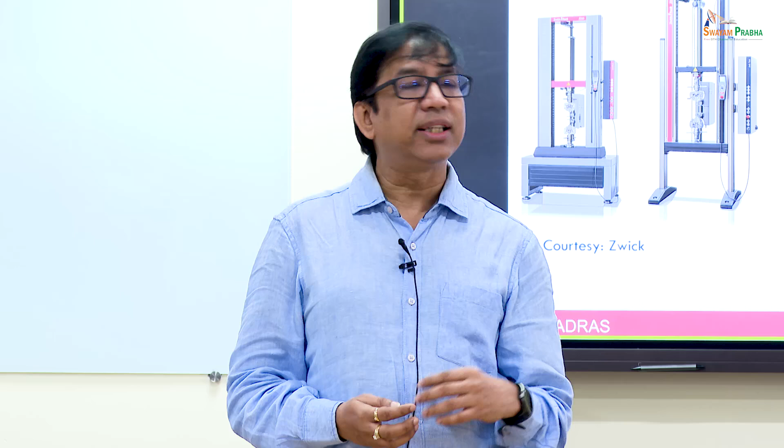Although you have come here and registered for additive manufacturing, and I would like you to know more about additive manufacturing, I think areas such as this are very attractive, but we also have to live in reality and see whether a certain technique, however novel it could be, would be industrially viable, whether we can really take it to applications. Therefore, I will take just 1 hour talking about mechanical properties of these materials.

So when you talk of mechanical properties of materials, obviously we need to know and understand how we do this testing. Testing techniques cannot change. Whether your manufacturing techniques can change, but testing techniques cannot change. Maybe it can get modified depending on the size of the samples, but the testing techniques cannot change.

Whatever mechanical testing techniques I talk about today is something you may already be aware of. But I still feel it's important to emphasize, because many times what we think we know, it's important to know much better so that we understand how to use these techniques for the kind of material systems we are working on, and for the techniques we have used. So the disclaimer is: you may have known this, but nevertheless it's important to quickly review it. If you have any questions, please feel free to stop me.

Why are we interested in this? We are interested because new manufacturing techniques enable us to look at applications. As engineers, we always look at applications. One of the prominent applications we are currently looking at is the use of these advanced ceramic materials for various applications - automotive, aerospace, semiconductor. These are three very vital applications where we generally look at using ceramic components.

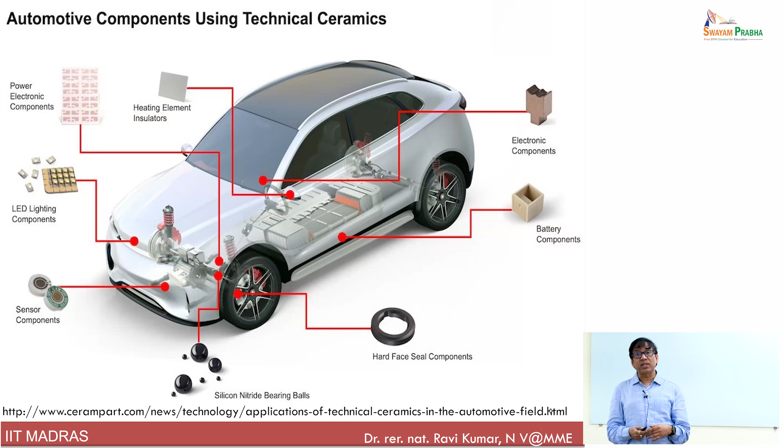One of the major manufacturers, I'm sure you would have heard, Tesla, is one of the major companies which uses technical ceramics extensively, as opposed to other companies like Ford.

Just to tell you a few more applications - ceramic coolers. How many of you are aware of it? I don't know. Ceramic coolers are very relevant in modern applications because they can be electrically insulating but have very high thermal conductivity. Of course, choice of the right metal becomes very important. So ceramic coolers and ceramic heat sinks for electric mobility is a modern choice.

I will show you another example where such ceramic heat sinks are manufactured, and which is not only used for automotive applications but also in electronics. Wherever you think we can replace metallic materials, which obviously has high thermal conductivity, we are looking at long-term stability and very harsh applications, while giving more or less the same results as a metallic material with high thermal conductivity would have given. So ceramic coolers and structured ceramic coolers are a reality as of today.

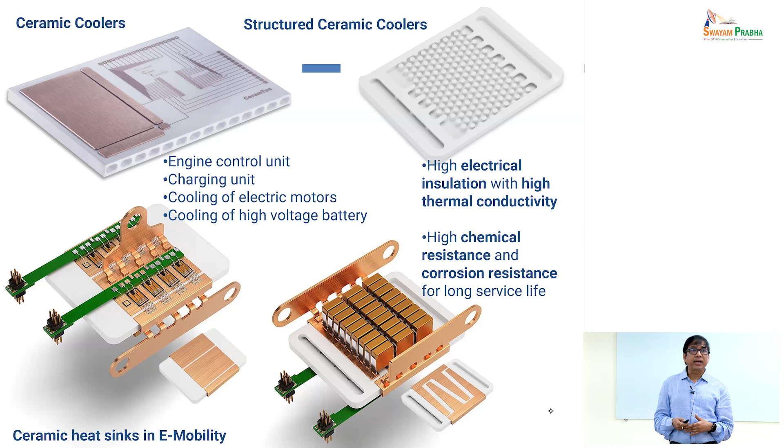If you look at this application, this is a ceramic heat sink - a very nice application, I really like this one. I show this many times because we have all seen heat sinks made of copper based materials, but I don't know how many of you have seen alumina and aluminum nitride based heat sinks like this, with printed electronics even over that. This is a very nice application because you are completely replacing it with a ceramic that has reasonably high thermal conductivity. For instance, aluminum nitride has a reasonably high thermal conductivity and can be a very good competitor to copper.

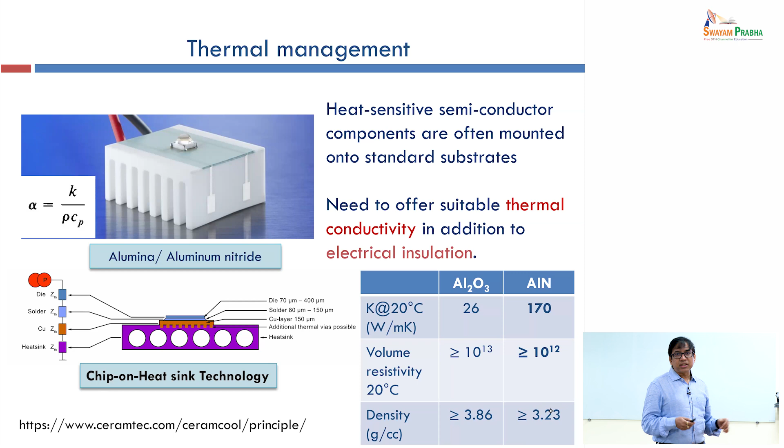But if you look at the geometry, to design a heat sink you require a very high surface area because you need to dissipate heat - that's the engineering part of it. And the material part is it has to have very high thermal conductivity. Now, having a high thermal conductivity, you can always talk to a very good ceramic scientist and he can tell you. But to make a ceramic heat sink like this with very high surface area becomes a challenge. That is where I feel a route such as additive manufacturing could be very much helpful, because manufacturing such ceramic heat sinks via other conventional methods and machining can be a problem. I think this is where additive manufacturing can be a very useful technique.

Another example I have started to use in recent times because I was very much impressed. Most of you aware of bearings might have seen bearings with steel balls or steel rollers. When I first came across this a couple of years back - that these steel rollers and steel balls are completely replaced with ceramic balls and ceramic rollers in bearings - I was very mesmerized, very impressed with the manufacturing of such silicon nitride balls and silicon nitride rollers in bearings. I continuously bothered somebody in Europe to send this to me, and finally he sent it to me, and I just wanted to show this to you. Don't drop it - if you drop it, I'll keep you here for a PhD.

So this is a silicon nitride ball manufactured by one of the European companies, primarily meant for use in bearings, replacing completely steel balls. Because if you look at steel, the density of steel versus the density of silicon nitride - silicon nitride density is around 3 gram per cc, and steel has a density at least more than 2 times that of silicon nitride. So we are already looking at use of such ceramics in load bearing applications - it's a load bearing application. So now you can see, can we manufacture such components using additive manufacturing - that is a challenge.

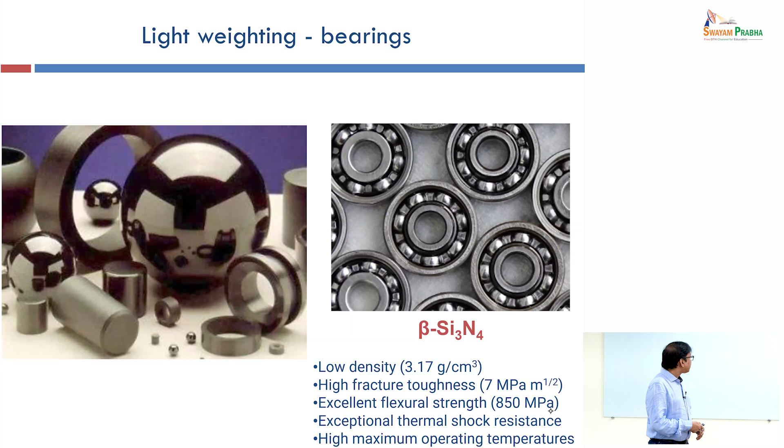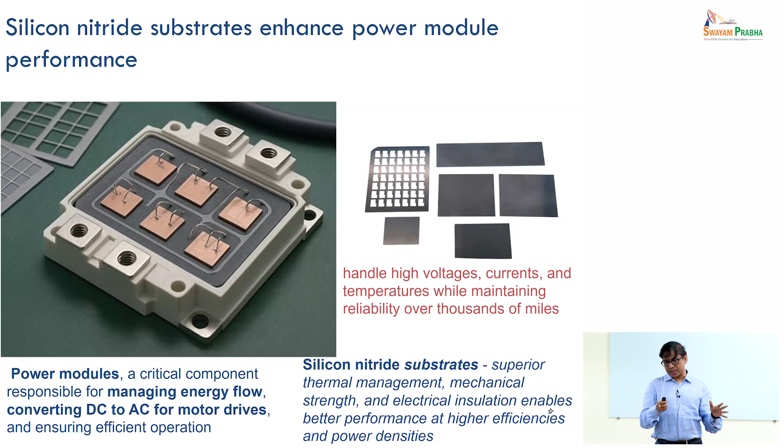Nevertheless, you should know that such applications are possible and very much relevant in modern times. This is again a silicon nitride substrate. I was very happy to see this because now silicon nitride substrates are used as power modules for electric vehicles, and people would like to manufacture them with almost no defects. This manufacturability may not be so complicated and may not require additive manufacturing, but you must know that such applications are now a common thing.

There are many other applications, like in automotive applications. I am very much impressed with this brake disc using carbon fiber reinforced silicon carbide composite. Obviously such a brake disc will reduce the weight to a large extent. If you are interested in automobiles and Ferrari, for instance, all the high-speed racing cars use these kinds of brake discs.

Many of you are from Chennai. You might have heard of this company, Brakes India Limited, which uses cast iron. Obviously cast iron blocks are much heavier, and people are using these ceramic brake discs for lightweighting—to have a car which is extremely light and can go at extremely high speeds.

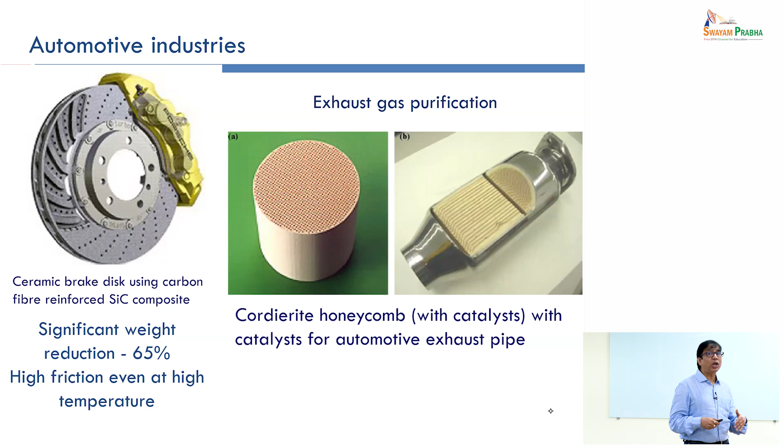Similarly, you can see honeycomb, cordierite structures with catalyst support to prevent and convert NOx gases or exhaust gases into cleaner emissions. I'm not saying all these applications can eventually be manufactured only by additive manufacturing route, but at least these applications are already in vogue, may not be extensively used, but people are already using them. And one could think of additive manufacturing routes, or newer routes, to manufacture them.

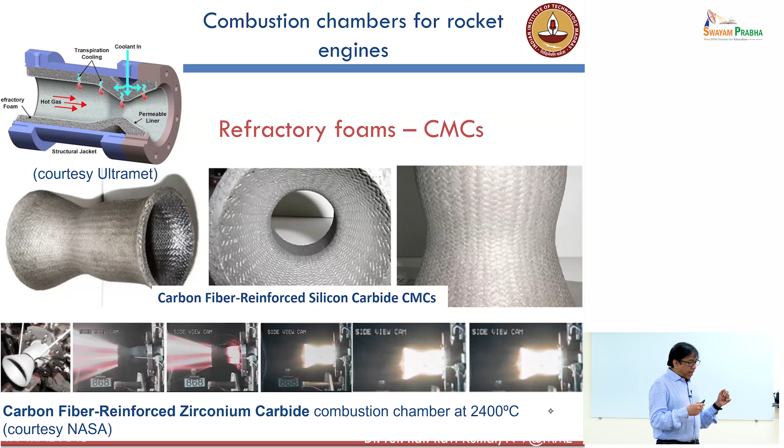I talked about very complex and high-profile applications related to automotive, aerospace, and so on. But additive manufacturing route is also very much in vogue for luxury and jewelry components. In fact, in one of the lectures, I even saw Paulo showing jewelry being manufactured using additive manufacturing.

This is something I saw for the first time maybe a couple of years back when I was in France, where one of the companies that manufactures 3D printing machines had put up a stall trying to manufacture ceramic cases and ceramic straps using 3D printing technique. That was the first time I really got impressed because I thought it's very nice. That was also when we first purchased, or thought of purchasing, a fused filament based 3D printer for our lab. I think some of you saw that yesterday.

Making this is again not so easy. Very few people can make such ceramic watches, but nevertheless it's a very nice niche industry. I don't know how many of you know a Titan ceramic watch may cost anything between 25 to 30,000 rupees, and there are Swiss brands and other European brands of ceramic watches which can be as costly as 5 lakhs to 10 lakhs.

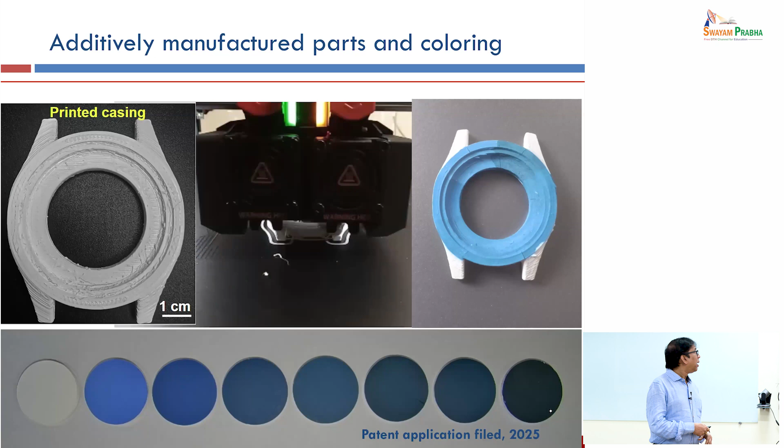I just wanted to bring context towards why, to make industry accept what you make, it's very important to convince the industry, particularly in the domain of ceramics, that it is mechanically stable. And when I say mechanically stable, we should have some idea about its deformation, its microstructures and defects, and some idea about its fracture toughness.

Unlike metallic materials whose fracture toughness is typically more than 50 MPa root meter, most ceramics have fracture toughness less than 10 MPa root meter. That is why they break. You drop it, it breaks. And therefore, please don't drop that silicon nitride ball. They said that it will not break, but I don't want to break it right in front of my eyes.

So it's very important to actually understand the deformation behavior. And deformation is a very elaborate issue. For example, when we talk of deformation, it could be deformation primarily because of mechanical load. It could be thermal load. Even thermal load causes deformation, which we categorize as thermal stresses causing issues. It could be a combination of thermal and mechanical, and also sometimes environmental factors affecting the deformation response of materials.

For example, if you have a crack in a material and if it is exposed to highly humid conditions, you will see how the crack can slowly grow if there is any presence of tensile stress in such components. And on the other hand, we are looking at what kind of application.

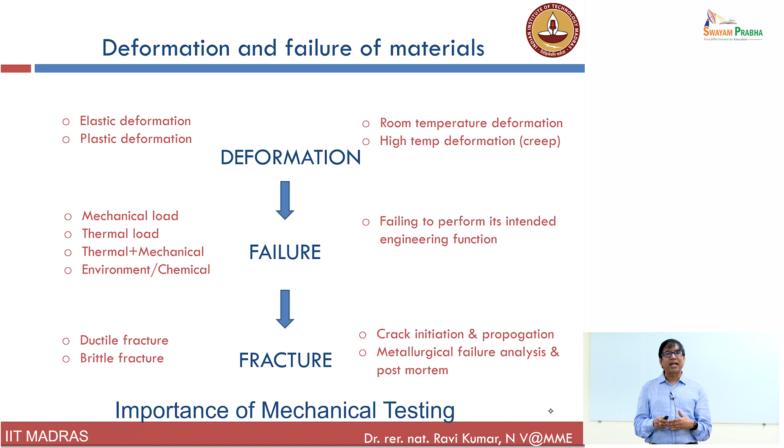As I told you, mechanical testing cannot change just because you are using a new manufacturing technique. You may have heard from Professor Paulo very nice, interesting talks on new methodologies in additive manufacturing of ceramics, but testing cannot change. So I will have to again go through the same mechanical testing which you might have studied even in your undergraduate studies. But it's better to go through, and we can discuss if there are still some questions.

Now, the biggest challenge I have realized is people don't know what kind of testing has to be done. Because everybody thinks that when you say testing, you do tension and compression. It's not like that, it's not as simple as that. When you do mechanical testing and want to evaluate the mechanical stability of the component, you have to look at what is the intended function and what is the intended application.

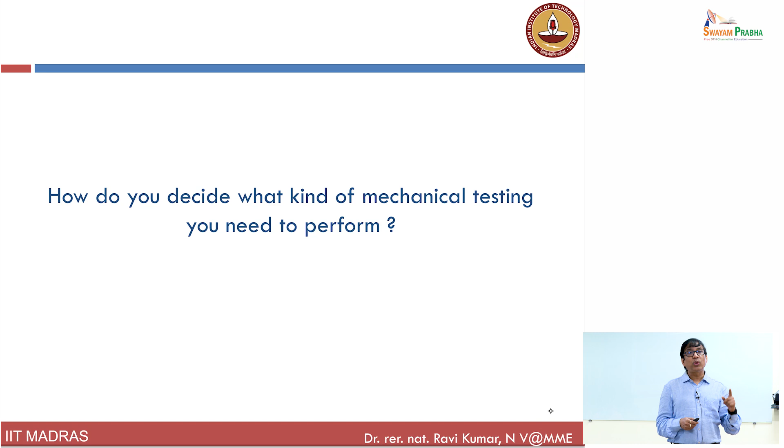That will determine what kind of mechanical testing you have to do. So it's very important to first understand what kind of mechanical testing you have to do based on the application. For that, you need to understand under applications or service conditions, what kind of state of stress these components might be subjected to. I'll take examples of metallic materials because it's easy to explain with them, since ceramics don't have as many diverse applications as metallic alloys. So I take examples of metallic materials to drive the concept, but that can be extended to ceramics as well.

I'll give you a few real life examples. I don't know how many of you have used a ski lift. If you've been to northern parts of India, or if you've been in Europe, you would have used ski lifts. If you look at this cable, it's usually subjected to a tensile mode of stress because it's always in tension. And if you look at this drive shaft, it is always in shear.

So the first job of an engineer is to first find out, in application or during service conditions, what kind of stress state each of these components is subjected to.

I many times ask students in class. For example, if a fan is rotating at very high speed, I ask them what is the state of stress in the blade of that fan. Or for example, if he's sitting on a chair, I'd like to know what is the state of stress in those pipes which actually withstand his weight. One should be able to quickly tell what is the state of stress in any component subjected to a certain application. In fact, once I asked a student what is the state of stress in the belt he's wearing, and he suddenly panicked.

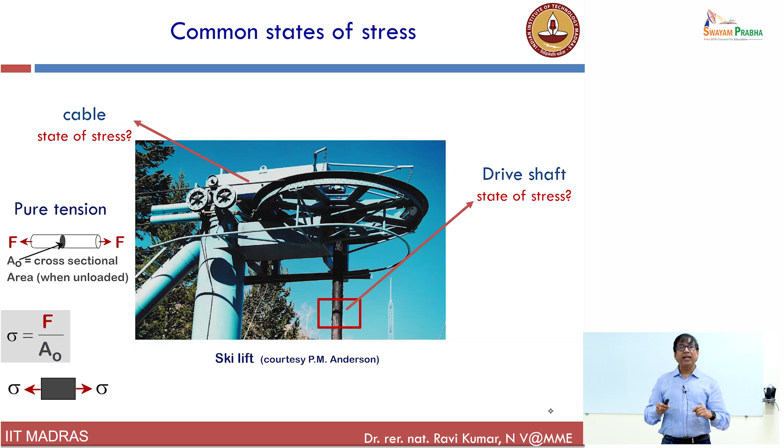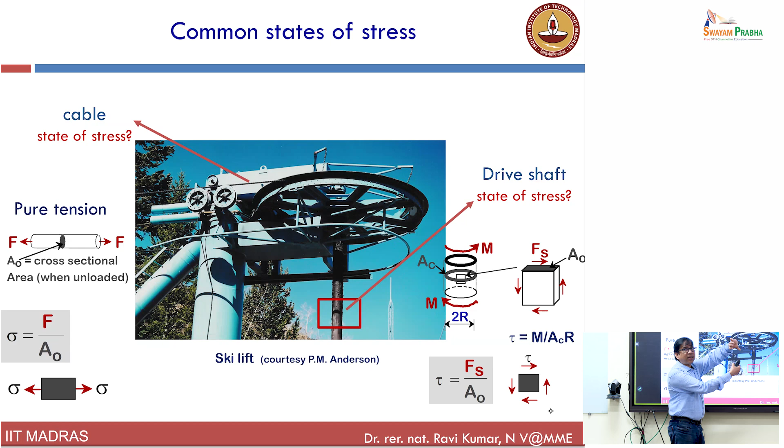It's uniaxial, and the cable will always have a very high aspect ratio and will always be subjected to a uniaxial stress state. Therefore it's mandatory to test such materials, which will go into the ski lift cable, under a uniaxial testing condition and design it for uniaxial load conditions. In this specific case, the drive shaft, since it's subjected to torque, is always subjected to shear, and therefore you need to conduct a shear test.

This is one such example. Some of you might have seen this, or been on such giant wheels. All the spokes here and these rods which hold this are all subjected to tension. Because they're subjected to tension, these particular elements or components have to be tested only in uniaxial tension. I'm just giving you an example.

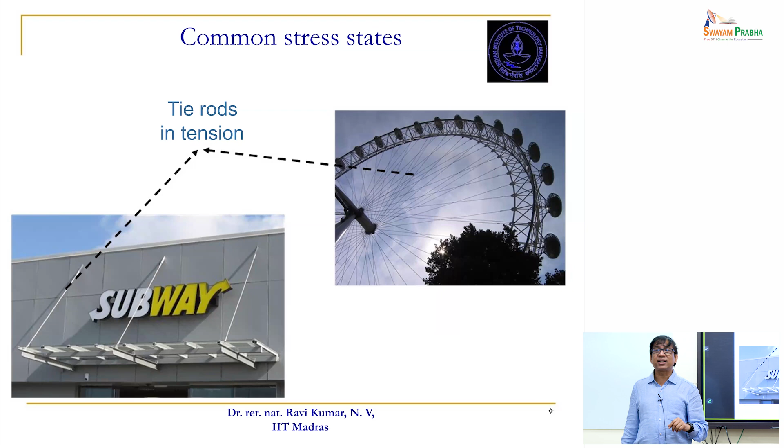Now this has to do with metallic materials. I can give you more such real life examples. For example, this is a tie rod in railways. Whenever you go in a train, just look outside the window and you'll see a tie rod which connects two components. A tie rod is always subjected to tension. So if you want to choose a material or design a tie rod, you always have to first subject the material used for the tie rod to uniaxial tensile conditions, and only then can you use it.

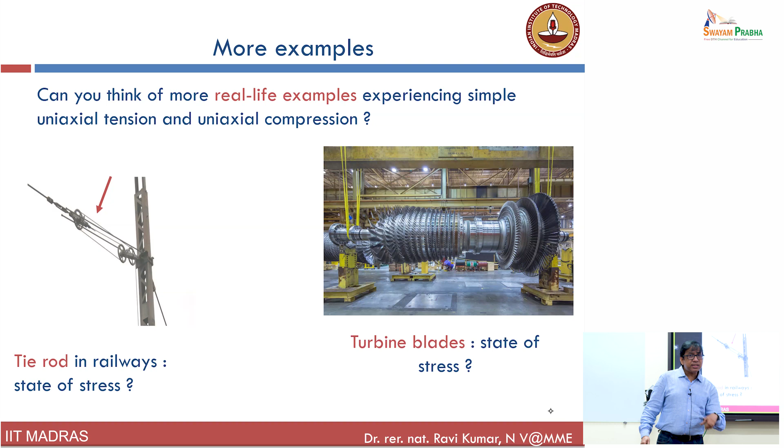Now, all the examples I've given till now have to do with metallic materials. If you move to a little more high profile application, like a gas turbine: many of you take a flight, and the heart of any flight is basically a gas turbine. The gas turbine has blades rotating at high speeds, and if they don't work, you cannot really fly. These gas turbine blades in modern times use thermal barrier zirconia based coatings, and that is why they can operate at very high speeds and high temperatures.

Now the ceramic relevance comes here, because you have a metallic material over which you have a zirconia coating, a ceramic, and they are rotating at high speeds. When they rotate at high speeds, the turbine blade is actually subjected to a state of tensile stress because of the centrifugal loads acting on the turbine blades.

Which means if the turbine blade is subjected to a tensile stress, then the zirconia coating on that will also be subjected to a tensile stress. So if you want to check the long-term reliability of zirconia coatings, you have to carry out a tensile test on such zirconia material meant for that particular application. It's very important to find out the final application and determine the kind of testing to be done.

I just gave you an example of why zirconia has to be subjected to tensile testing, uniaxial tensile testing, for zirconia going into a turbine blade.

But if I think of a zirconia tooth, for example, I had a root canal treatment and replaced it with a zirconia cap. You know that a ceramic tooth cap is usually made of tetragonal zirconia because it is quite tough. But the zirconia tooth in my mouth, I don't subject it to a tensile test, because I always chew it and subject it to a compression test. So the zirconia that goes into my tooth, I have to always do a compression test to qualify that material.

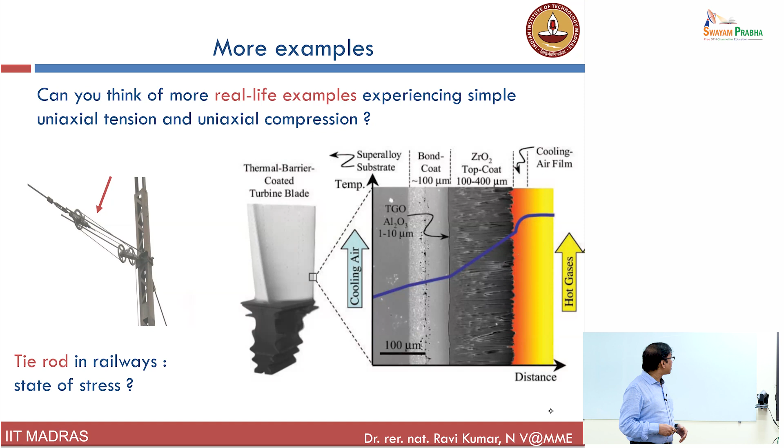I don't know how many of you have seen these high tension cables and the insulators outside. For example, this porcelain suspension insulator string is always under tension, and therefore such porcelain insulators will always have to be subjected to tension, and then you evaluate the properties.

Now if you look at it, it's not so easy, because the shape is not just cylindrical, the shape is complex. You cannot just take a cylindrical porcelain rod, do a tensile test, and say this is my tensile strength. It need not be, because ultimately in use it will not go as a cylindrical rod, it goes as a ceramic disc. Which means you cannot translate the tensile strength calculated for a porcelain rod directly to this, because it is not used as a rod, it is used as a ceramic disc. So shape will also matter.

Now, can we do such mechanical testing all the time? No, not possible, because it's very difficult to manufacture that kind of component and do tensile testing. So what design engineers generally do is add a factor of safety to make sure you can still go ahead, because you may not have been able to perform tensile tests on actual shaped specimens. So you apply a factor of safety and proceed with your design calculations.

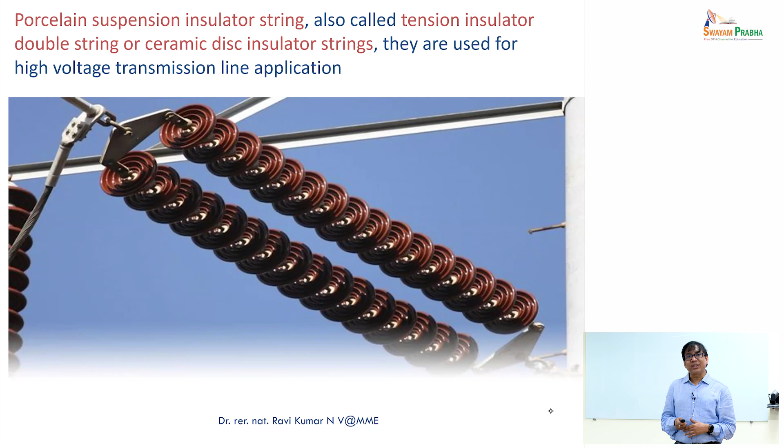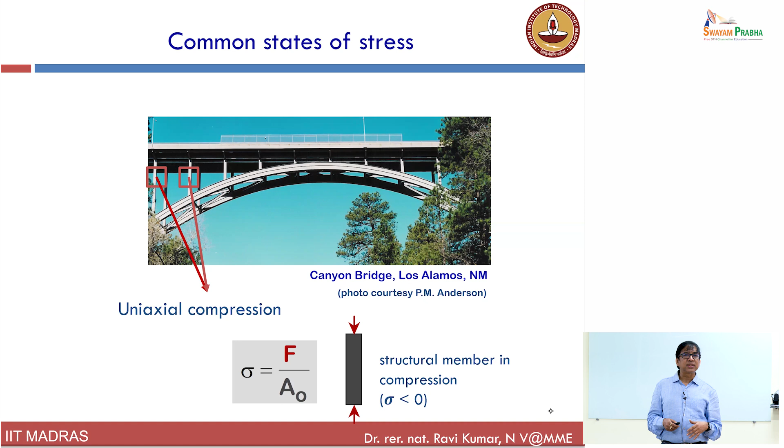So I talked to you about the design part and gave a few examples for tension. But most ceramic components are not really subjected to tension - most ceramic components are good in compression and weak in tension. So generally whenever we deal with ceramics, we are mostly interested in carrying out compression tests. We do compression testing, calculate the compression strength, and report that as the compression strength of the sample. But these are samples of uniform shape and size.

But in reality, you will not have uniform shape and size of components. For example, I was talking to a professor in engineering design a few days back. She was asking if we could make a shell like a skull kind of thing using a 3D printed part. Yes, we can make it. But a skull type or hemispherical shell will not be subjected to a uniaxial loading condition. So you must understand, if you make a ceramic cylinder, you cannot simply do a uniaxial tensile test and use those properties for designing it - although I'm not showing a ceramic cylinder here, the concept is the same.

You cannot simply do a uniaxial test. Look at this example, something most of you have seen - a gas cylinder at home. A gas cylinder is an internally pressurized cylinder, and because of the internal pressure, the wall is always subjected to biaxial tension. So you cannot do a uniaxial tension test on the material used for the cylinder and design the cylinder. That is not possible, not correct.

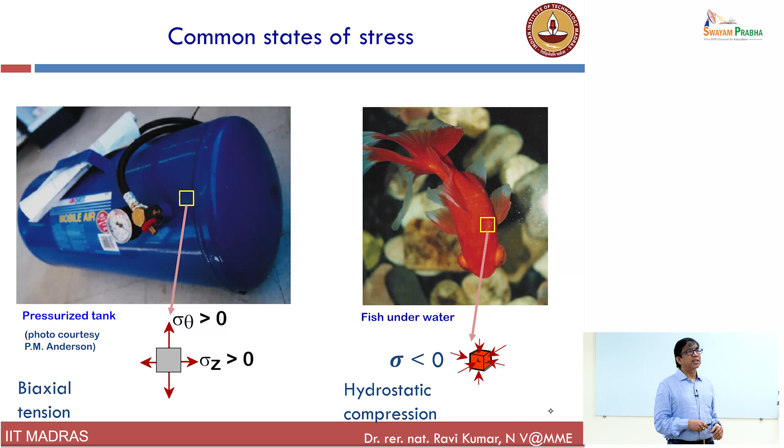I'm sure many of you might have seen such kinds of cylinders - they are all subjected to biaxial tension. I don't know how many of you know this kind of thing - it's a swimming pool dive board, but typically meant for resilience.

That is, it has to absorb energy and give back energy. Although in a dive board nobody uses ceramic, there are applications where ceramics are used - for example, sensors, sensing devices where ceramic sensors are subjected to uniaxial bending like this, requiring some level of flexibility and compliance. You must know, if there is such an application, what we are dealing with - something called resilience, the ability to absorb energy and give it back.

The reason I'm not giving a lot of ceramic examples but other examples is that this is easy to realize, but there are ceramic examples as well, and whatever you see here can be directly translated to ceramic examples. So this is a uniaxial flexure condition - it's a dive board. That means if somebody stands here, puts pressure and then jumps, he basically gets all that energy he had transferred to the dive board back, so he can jump very well.

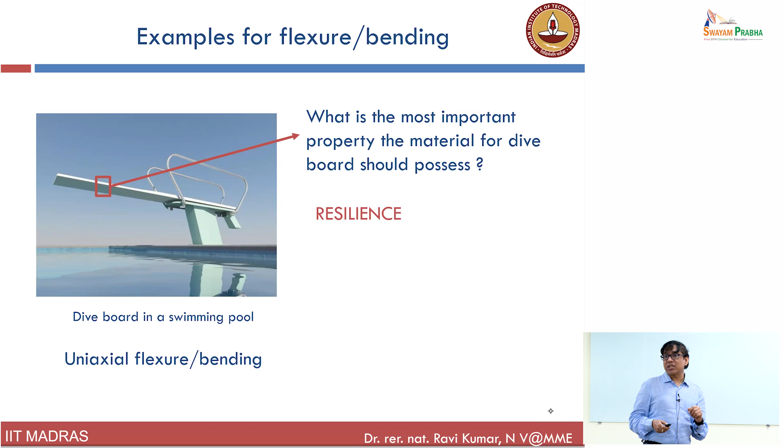That is what is called resilience. If you take a tennis ball and drop it, if it bounces back, that means it has resilience - the ability to absorb energy and give it back. That kind of application is very important in ceramics, particularly for some sensing applications. So to summarize, you need to know what you are measuring, what kind of testing technique, and what kind of loading you need to do to get the most important properties of materials like stiffness, strength, toughness, ductility, and so on.

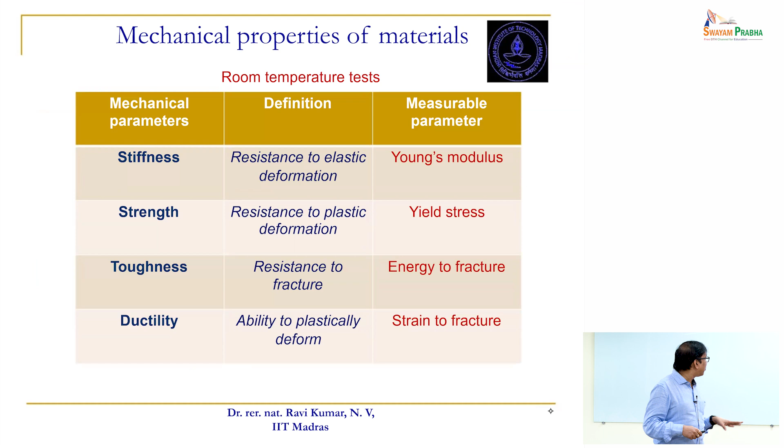Obviously, ductility is not a very important topic for ceramics, but you need to know what you are doing. So I'll go ahead quickly since tension testing is something you know - it's very common even in undergraduate studies. But the biggest problem I've seen is whether you're doing such testing correctly. Anybody can do a test, but are you doing it correctly? The biggest challenge is when you're doing a tensile test, I always ask what strain rate you used.

The typical strain rate that you have to use is something like around 10 power minus 4 per second. If you don't do that, you are not really getting the right result.

Again, the biggest challenge is when somebody does a tensile test, I ask them, did you do compliance correction? And many of them are just blinking, they don't know what compliance correction is. Compliance correction is all about the fact that any machine will have its own stiffness. So whatever data you get from the machine, is it exactly the data from the material, or does it involve contribution from the machine also? That has to be taken care of. Whatever contribution comes from the machine stiffness has to be removed. That is what is called compliance correction.

So irrespective of tension, compression, or bending, whatever testing technique you use, you always have to do compliance correction. It is nothing but removal of the instrument's contribution to the data you get from the material. Once you remove that, whatever data you get is purely because of the material contribution. So compliance correction is very important.

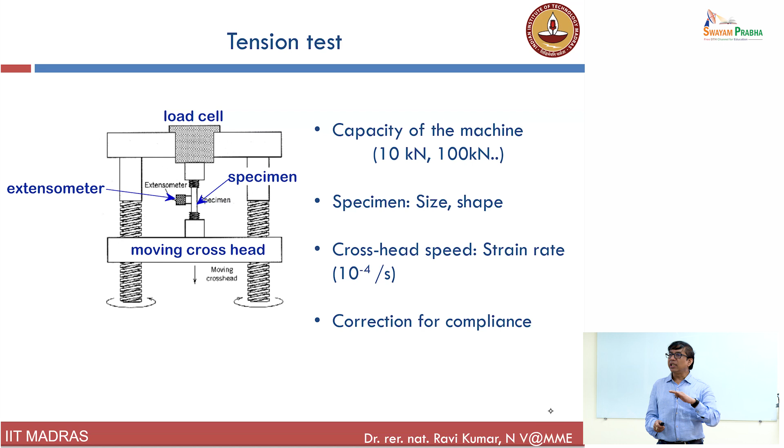And of course, one thing that everybody misses is compliance correction. Unless you do compliance correction, the mechanical data you get is not completely correct. People who are into mechanical testing will know this, but people who are not generally doing mechanical testing regularly may not know. But when you do mechanical testing, and for that matter many other kinds of testing also...

In mechanical testing in particular, you have to always follow standards. You cannot simply take any shaped specimen of any size and do whatever you want. There are ASTM standards which you have to follow. For example, if you have to make a dog bone shaped specimen to do a tensile test, you have to make a dog bone shaped specimen. If the gauge length is fixed to a certain level, you have to have a sample of that kind.

If you cannot, for example in ceramic samples, it's very difficult to always follow ASTM standards, then you have to do a large number of tests to validate it. Otherwise, people will not accept your data. In metallic materials, it may be easy and it is well established. In ceramic samples, it's not always well established. You may not have ASTM standards to follow.

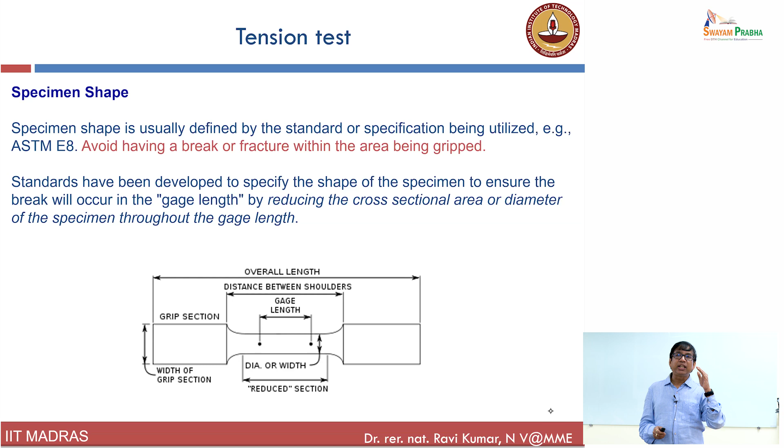And when you do not have ASTM standards to follow, you have to do lots of tests. If you're not following standard specimen size, then you have to perform lots of tests, validate the data, and confirm to people and the community that you have actually generated a lot of data, and therefore the data is reliable. And other issues are mostly how to handle it. For example, this is again something I have noticed more in India.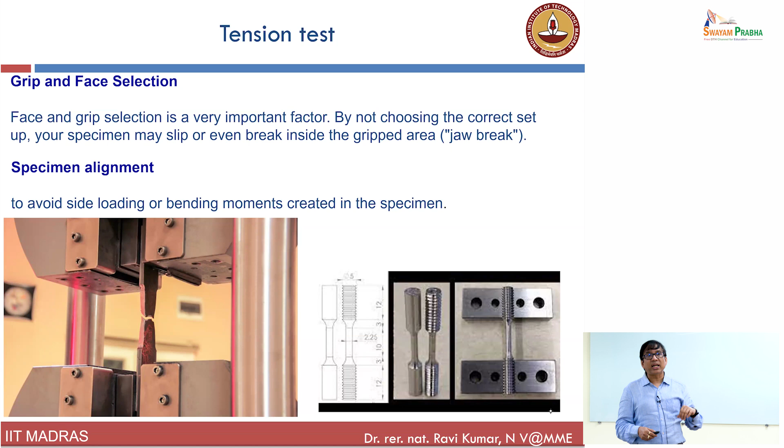Not to compare how it is done in other countries, but it's important to know, many of them do not take care, even when they do a simple tensile test, of fixing the samples properly. It's very important, if you want correct data, to fix it properly and make sure there is no slippage, so that the data you get is accurate.

Now these are some very basic things a technician should do, but nevertheless we should be aware of it. And the biggest challenge is to measure strain, because in a typical tensile test you need to measure strain. For metallic materials it's not a problem.

But for ceramic samples it's a problem, because the strain in ceramic samples is very low. In fact, 0.5% is the failure strain of many ceramic materials. That means you are dealing with extremely small strains, and when the strain is so small, your ability to measure it should be very, very accurate, otherwise you will not get correct data. For that, of course, you have strain gauges.

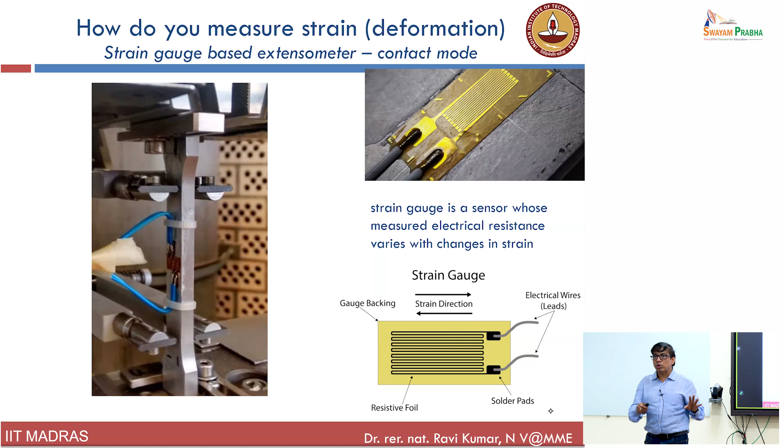People use contact mode strain gauges, fixing them and then measuring. Again, easy to do for metallic materials and not so easy for ceramic samples. But in modern times, people use laser extensometers, which let you see the change in length caused by the tensile load. That's a non-contact mode, and it's also very relevant, for example, if you have wires.

Nowadays, one of the challenging topics in ceramic science is making ceramic fibers. When you want to test ceramic fibers, both fixing and measuring the change in length become very challenging. For example, we work on ceramic fibers and filaments—it is not very easy. In fact, we have tried with glass fibers too, and it's not so easy.

When you're dealing with extremely brittle materials like glass, ceramic fibers and so on, you have to know how to fix these samples. It becomes so critical—many think fixing is a trivial thing, but it's not so easy with ceramics and glass samples, particularly fibers. It's not a problem with metallic wires, but definitely a problem with ceramic fibers.

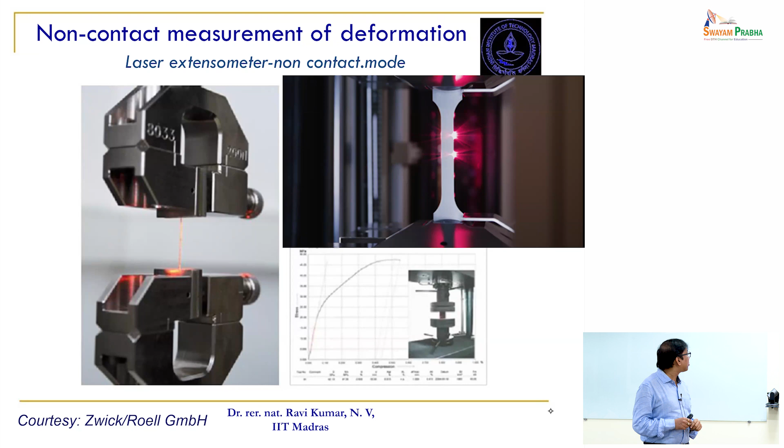If you are able to fix it well and measure the strain very well—ceramics show very limited strain, but you should be able to measure it—then fantastic. It is the laser extensometer which is now used, and in modern times people are also using the digital image correlation technique.

I am not sure how many of you have heard of this. Basically, you make a speckle pattern: you take the sample, whatever it may be, ceramic or metal, apply white paint, then put black dots in a random speckle pattern, and use high resolution, high speed cameras to capture the relative displacement of all these points to get a complete strain contour.

So unlike strain gauges and laser extensometers, digital image correlation gives you a complete strain contour map—complete information about the strain over the entire surface. That non-contact mode also helps us get away from the strain gauge problem, because a strain gauge tends to peel off when deformation takes place. So non-contact mode is a fantastic thing.

Again, easy to come and give a lecture, but not so easy in practice—we have used digital image correlation technique for ceramic samples, and it's not so easy to capture strain particularly in the elastic region. Why I'm saying this is that many people think mechanical testing is very easy. It's not easy, if you want reliable and credible data. In fact, one of my former students really struggled to get elastic strain, which is extremely small in ceramics, using digital image correlation technique.

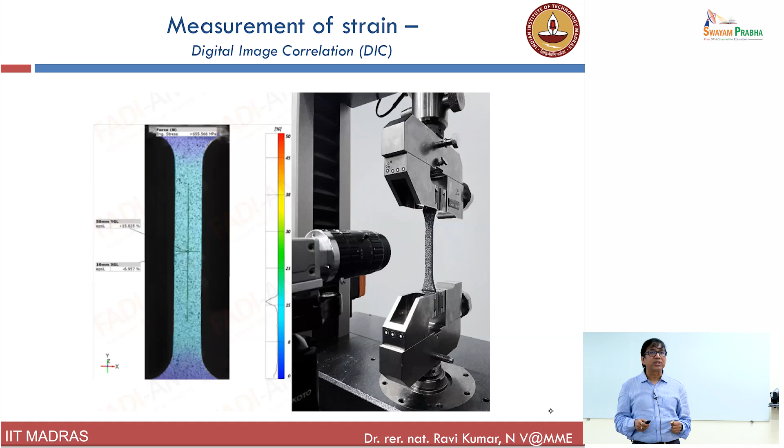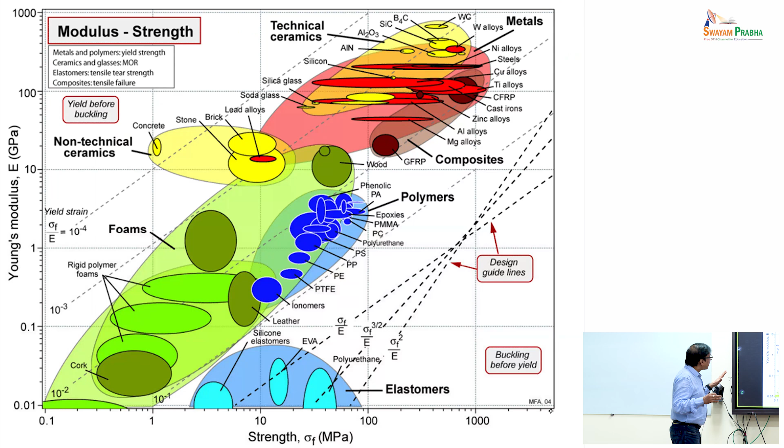So, challenge. This is the kind of challenges that we actually face. And for people to get a rough idea of where we stand, this is a Young's modulus as a function of strength. So obviously, technical ceramics will be on the right hand side, top corner, because their Young's modulus is also high and even strengths are high.

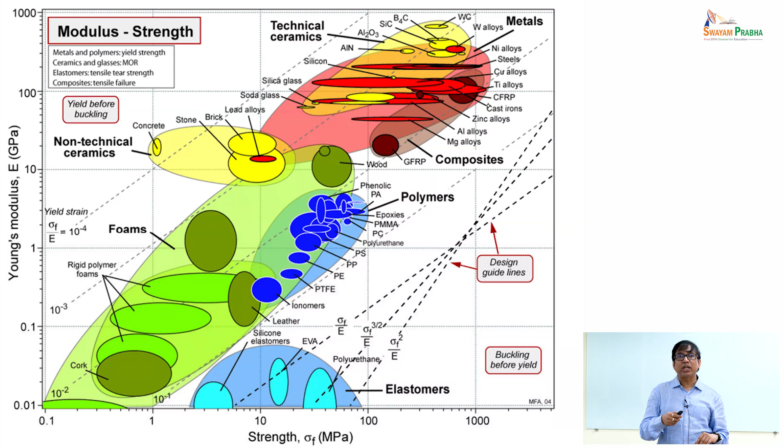So we are always dealing with materials of this level, which means when you are talking about strengths close to a gigapascal, and Young's modulus in the order of several gigapascals, unless you have ability to measure them accurately, then you fail. So that is the reason why you need to have a rough idea of its strength and Young's modulus, so that you can deal with such kind of machines.

I think I already talked about resilience, because resilience is all about how much energy it can absorb and give back. So this is a very important design concept. I actually show this because you can have the same Young's modulus but different resilience. That is, I can take two different materials with the same Young's modulus, but ability to absorb energy and give back can be very much different.

And I used to show this example particularly in the context of bulk metallic glasses, which when I was a student, used to be made into ribbons. And now bulk metallic glasses are used in tennis rackets. They are used for energy absorption applications and so on, because bulk metallic glasses have very high strength as well as very high ability to absorb energy and give back.

And when any material can absorb energy and give back, that means that is a highly resilient material, and that you can calculate very easily. The area under the elastic stress strain region is actually a measure of how much energy it can absorb and give back. That is called resilience, and that's a very important concept.

One example that I can give you immediately, which you can relate to, is a spring. A spring is something that can take load and give back. But most of you have seen steel springs. How many of you have seen glass springs? How many of you have seen ceramic springs?

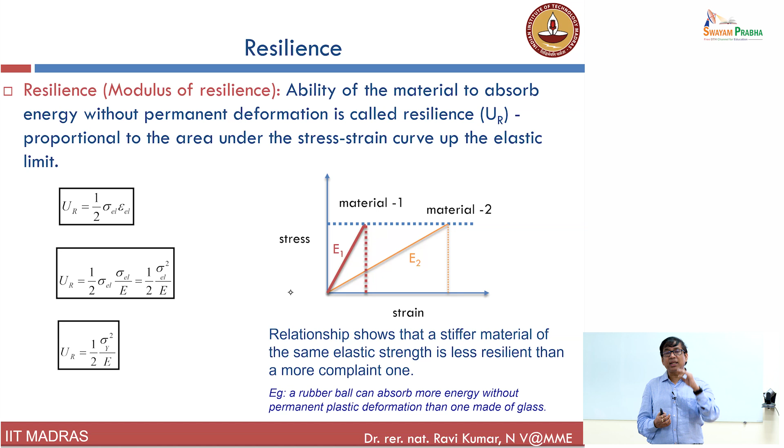In fact, glass springs and ceramic springs are really relevant, particularly when you're dealing with ability to absorb energy and give back, and at the same time being light. Glass and ceramic springs really outperform even steel springs, which you may not know. This is when you're dealing with macro size samples and so on.

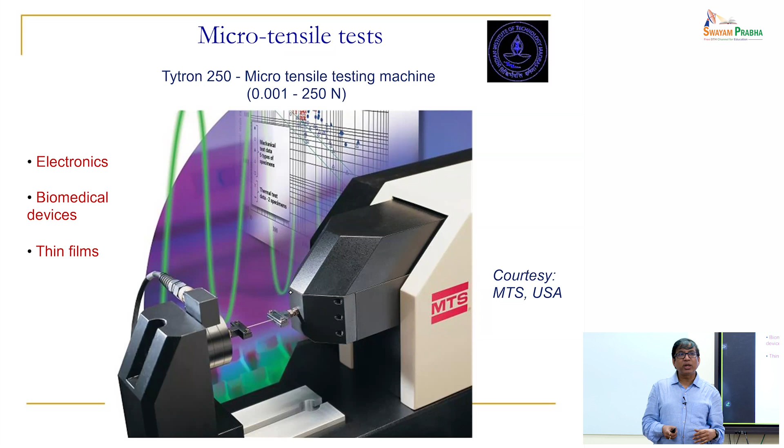It's from a company called MTS. I mean, I've put MTS, but there are other companies also which can provide you this. And these kind of testing machines are typically used for maybe thin films where you require extremely low loads, or even materials used for biomedical devices, some electronics you want to test, and so on. But anyway, coming back to compression tests, which is more relevant for ceramic samples.

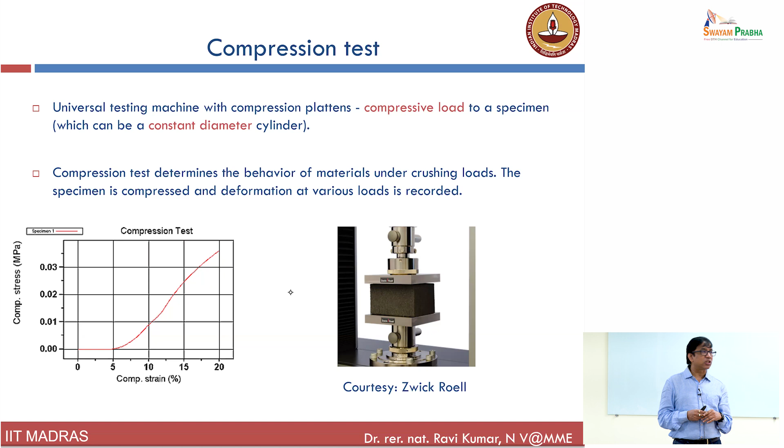It's not so easy, again, because ceramic samples are not so easy to manufacture in a certain way. So generally, there is more leeway and leverage on the shape and size of the samples. But to test the strength and get a typical deformation response for ceramic materials, we always use compression tests, typically with the same strain rate, in the order of around 10 to the power minus 4 per second, and generate the load displacement curve. And for that matter, all brittle materials, you can do that.

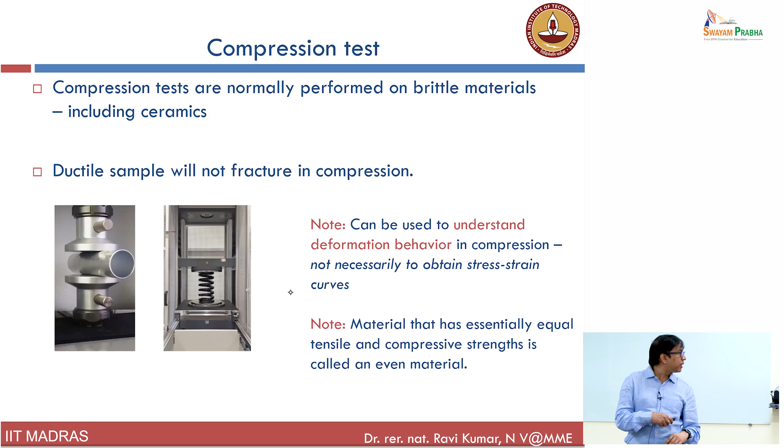When you use a compression test, we also look at the application. For example, springs are typically used in compression, so people measure the deformation behavior of springs under compression. This could be metallic or ceramic. Again, look at the application and decide the testing technique to generate the data. So this is just to give you an example.

You never do a compression test for ductile samples, because if you do a compression test on a ductile sample, it typically tends to barrel and you don't get useful data. On the other hand, if you do a compression test on a highly brittle material such as ceramics, it typically fails in shear at 45 degrees. You get good data, and you can actually get compression strength reasonably accurately, and understand the deformation response. So compression tests are typically used for any brittle material, including cast iron, which is quite brittle, and of course for all ceramic samples.

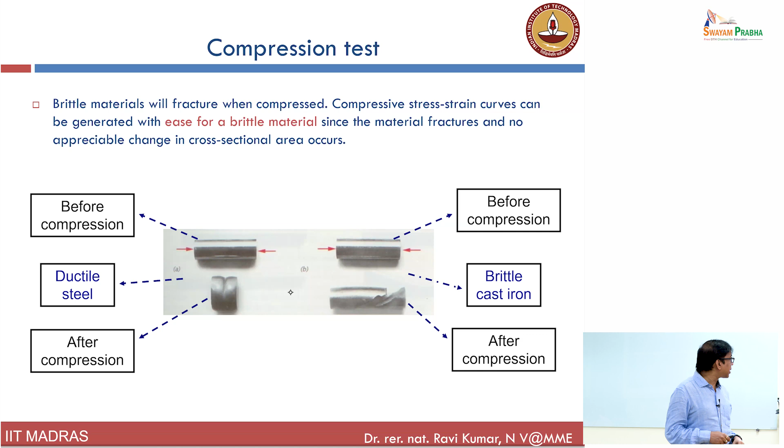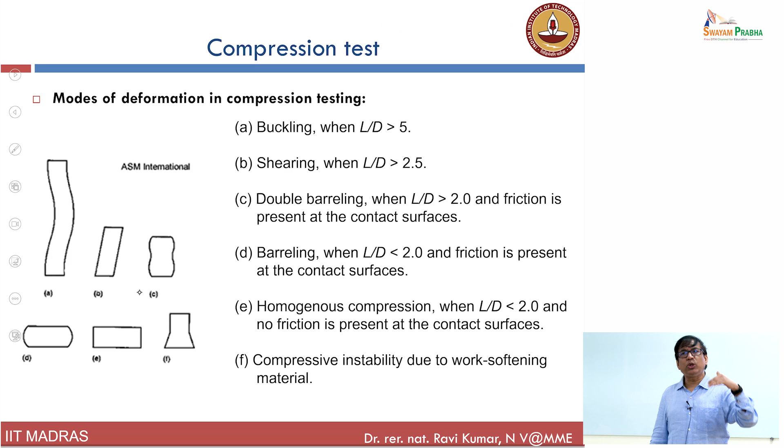The only thing you must know in compression testing is that the compression coupons must be designed so they don't buckle and don't fail in a mode they shouldn't. For example, we want the compression samples to usually shear. This is the kind of L by D ratio you'd like to have, so compression tests are done based on the L by D ratio so it doesn't buckle, and you must ensure it fails by shear and not by anything else. This is something you must know.

Another important testing technique, used for brittle materials or even ductile materials, is bending. The bending test is one of the very important qualifying criteria for many applications in ceramics. Of course it's done for metals as well, but definitely for ceramics.

I have this question, and I ask it many times because people report bending strength test data here and there. But what kind of bending test would you do? You would have seen people doing a 3-point bend test, and you also see people doing a 4-point bend test. But you must know what exactly you are getting from each of them.

People report 3-point bend test results, and people also do 4-point bend test. I know a lot of the ceramic community who uses only 3-point bend, and I also know a lot of people who use 4-point bend. The biggest challenge in the ceramic community, when they do this mechanical testing, is that most of them come with a materials science or chemistry background. Because of that, they don't really worry too much about what kind of testing technique to use, possibly because they don't have that strong an idea.

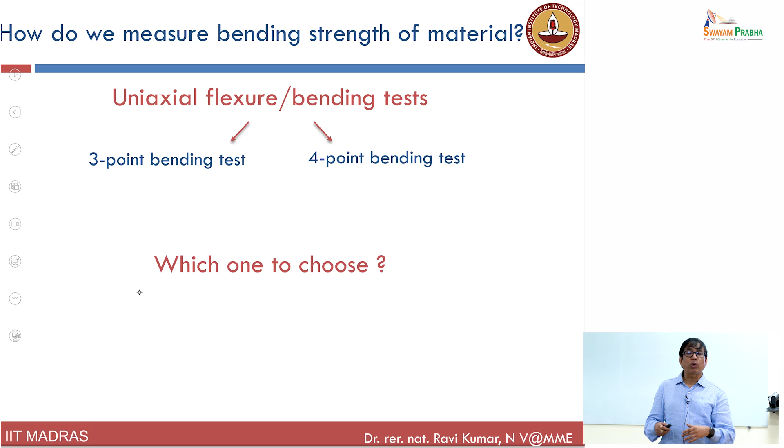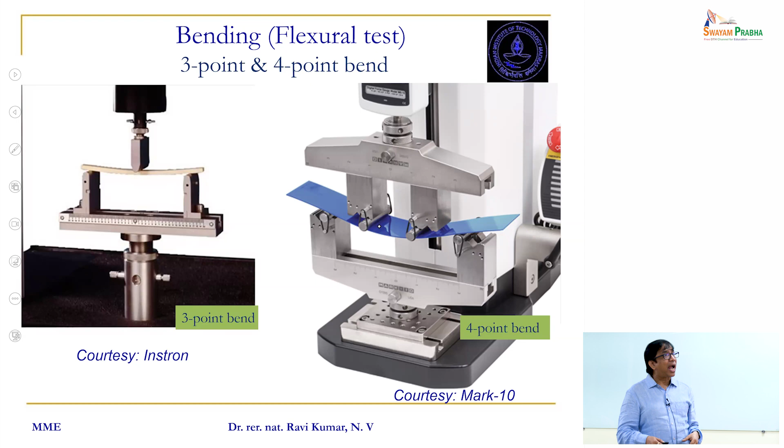I don't know which one you have seen in real life, but people use both. What is actually really correct? What gives you an accurate description of this uniaxial bending strength? I usually ask this question to many students in class, because they would have done this in their first year engineering course, and I want to check how much they relate it to what they studied then, but I find that not many people can.

Please note that when you do a bend strength test, what actually gives you an accurate description is not 3-point bend, it's always 4-point bend. The reason is very simple, and it's something everybody learns in first year engineering but nobody keeps in mind. 3-point bend is not good and 4-point bend is good simply because you have a constant bending moment between the loading spans in a 4-point bend test, which is not the case in 3-point bend.

In a 3-point bend test, if you recall your first year engineering courses - engineering mechanics and strength of materials - you would have learned about bending moment diagrams and shear force diagrams. These diagrams clearly show that there is a constant bending moment and no shear between the loading points in a 4-point bend, but that's not the case in 3-point. Therefore, a 4-point bend test gives you a much more accurate description than a 3-point bend test. Many people don't realize this, especially those coming from chemistry, but people in engineering should know this. So I always suggest doing a 4-point bend test because then we know what we are dealing with.

So the real reason 4-point bend test is used is because it is free of shear, and you get bending strength data which is actually accurate. This is something I always emphasize - don't do 3-point bending.

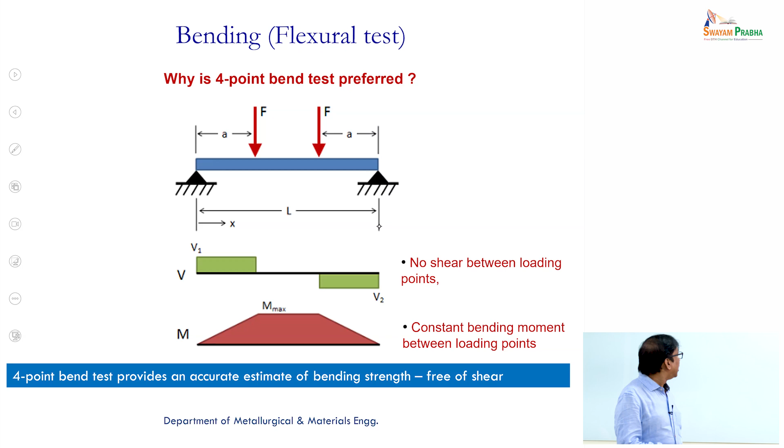Now I just want to see if this video still works. If it doesn't work, then fine. Okay, it doesn't work, leave it.

Anyway, you have a lab class here, I think they'll show you. We have made a very small testing machine, primarily for ceramic samples to do compression, bending, and so on. I don't know if that machine is ready - they had assembled everything. So you can have a look at it.

We made a very small scale testing machine primarily to deal with small scale samples, because when you do additive manufacturing you can't fabricate big parts and waste material, and many are expensive when dealing with ceramics. So we wanted to make small size samples and test them. I want to show you some new results we've done in our own lab, coming to some of the mechanical properties we investigated for our own samples.

After all the optimization of thermal debinding, chemical debinding and so on, we prepared compression test coupons for mechanical testing. One thing I told my student is not to waste parts because fused filament based fabrication is expensive. So when you want to establish a mechanical testing protocol for an additively manufactured component, you don't have to fabricate a complex shape and then test, because that is very difficult to even analyze - you cannot even get useful data. So what I generally suggest, as someone who works on mechanical properties of materials, is you simply prepare coupons.

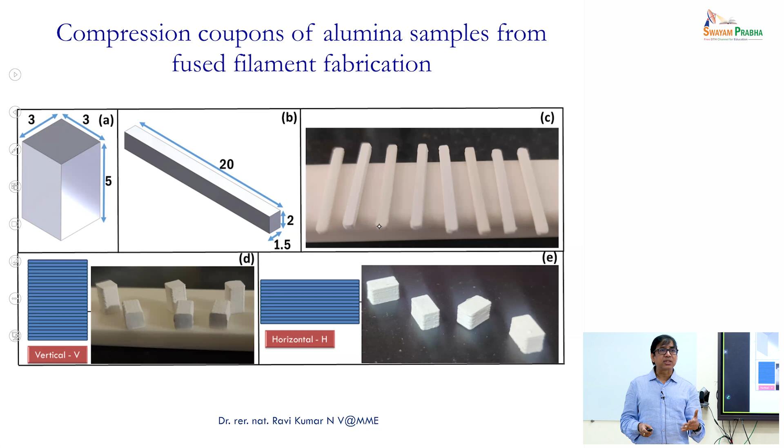That is important for me because that will establish what kind of anisotropy there is in mechanical results or in compression data that I would get.

As material scientists, the first thing we do is look at the microstructures, because the properties of materials, definitely in metals and more certainly in ceramic materials, directly correlate with the microstructures.

Anybody who has worked in fused filament fabrication would recognize this interlayer weakened points, including open spaces that we see in fused filament based ceramic components. These are actually weak points for ceramics, and therefore we wanted to test, when we do mechanical testing, both in the printing direction as well as in the direction perpendicular to the printing direction.

I'm just showing you the microstructure, how it looks like. Of course, they were sintered at various temperatures ranging from 1475 to 1600 degrees Celsius, so you can see all these which were sintered at various temperatures.

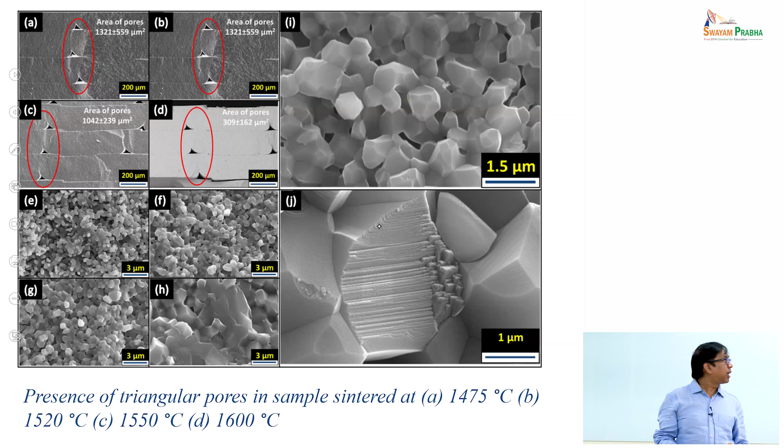But that's not the point. The point is what kind of defects do you still have? That will determine the compression strength values, and it also shows how sintering can change the microstructure in terms of porosity distribution. From 1475 to around 1600 degrees Celsius sintering temperature, the pore fraction in the material could change, and that will contribute to the mechanical properties, definitely to the tensile properties, relatively less in compression, but it does contribute.

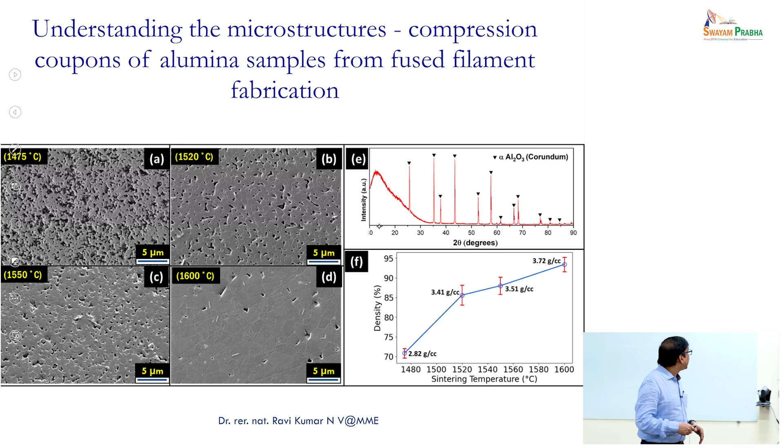But so long as your anisotropy is limited, so long as it's not so much, then irrespective of the direction you test, you may get more or less the same result. But you can see even the standard deviation is not well within the error, so it's definitely different.

What we recently did, which I'm not showing because we haven't published this paper yet, is one of the students had the idea that whatever pore fraction or interlayer weakness and triangular pores we saw in the previous slide, why don't we actually heal them using some precursors. That was done, and we removed all those weak points in the material.

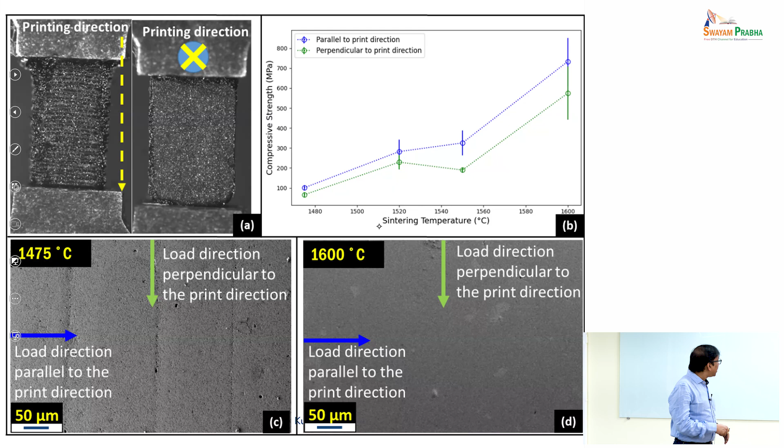After that we did testing, and the properties improved to a large extent, and we are very happy. We have now submitted those results to the European Ceramic Society to see if people find it interesting.

So it's always good to have small scale testing techniques so you get the best properties of the materials while not wasting them. The only issue is, can I rely on that data? That's why it's important to carry out a large number of tests to prove to the community that this is a valid small scale testing technique.

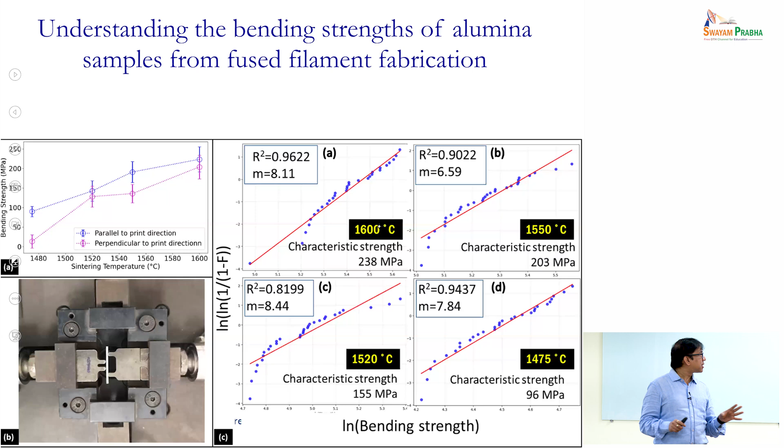I have maybe 7 or 8 more slides on fracture. Let me go to the last slide: in ceramics, irrespective of the manufacturing technique, these are very important factors that govern things. For example, the chemical environment, the loading rate, temperature - all that would matter.

Similarly, the fracture strength is always a statistical case - there's always a statistical distribution, and that's very important. Therefore, Weibull modulus becomes important. In ceramics, the crystal structure also plays a very important role, because that determines the cleavage planes, and what kind of environment it deals with can govern its fracture behavior. So this is very important.

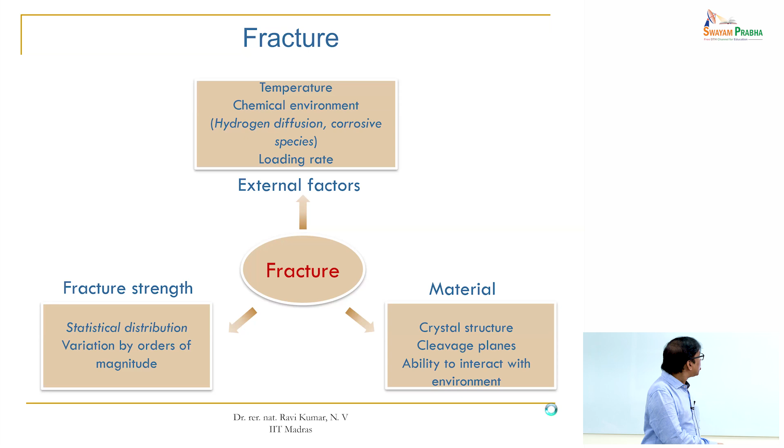I've summarized this because ceramics has to do with fracture - it will fracture at some point of time, so you need to understand it very clearly. I will skip the other basic things and go to the last part, where I can quickly talk about testing.

One of the important testing techniques we use in ceramics is to determine the fracture toughness. For example, glass has a fracture toughness of less than 1 MPa root meter. If I throw a stone at it, the glass will break because it has a fracture toughness of only 0.5, 0.7, 0.8 MPa root meter, so it's extremely brittle.

A metal has a fracture toughness of more than 50 MPa root meter. Ceramics typically have a fracture toughness anywhere between 1-2 MPa root meter to around 15-20 MPa root meter. A highly tough ceramic microstructure may reach 15 to 20 MPa root meter. The dream of any ceramic scientist is always to improve the fracture toughness so it can have real-time application.

But for that, you need to quantify it, and quantification requires a methodology. One important methodology is called the single edge notch beam. Basically, you test the sample like in 4-point bending. That's why I said if you have a 4-point bend setup, you can not only measure 4-point bend strength but also fracture toughness.

If you don't have a crack, you get the 4-point bend strength. If you introduce a crack as per standard, you apply load to the extent that the crack extends, and you know the load at which the crack extends - that's the critical load. L is the length and W is the width, D is half the thickness, and that gives you the critical failure stress.

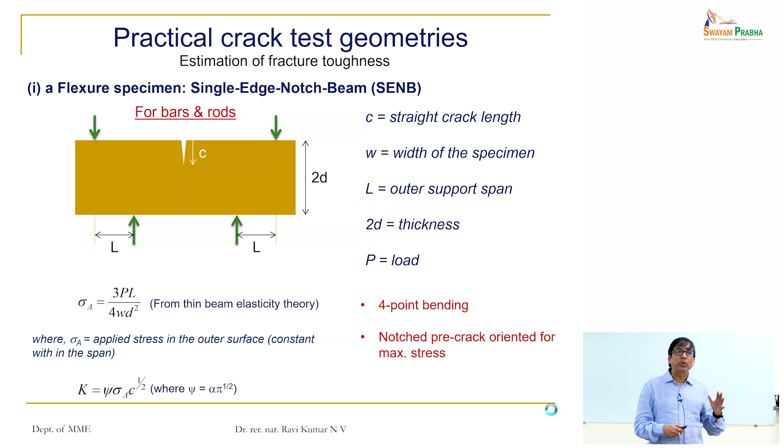Whether it's for toughness, fracture toughness, or strength, you have to do at least 5 tests. Five is still small, but if you can do 10 to 15 tests, you get a very good estimate of values. So I will skip the other parts and go directly to the last one.

Ceramics are defect intolerant, unlike metals. So you have to understand that even a very small defect in ceramics can be a point for initiation of failure, unlike metals. You have to be very cautious of that, more so in additively manufactured parts, because there you also have to look at flaws and thoroughly check for defects.

Anisotropy in microstructures is important. Depending on the manufacturing technique, it's important to look at the anisotropic character, and that will determine behavior. Ceramics tend to be weak at sharp discontinuities, so you need to be careful of that.

Additive manufacturing in ceramics has been in vogue for a few years, but I think mechanical testing protocols are still not established. More tests have to be done to really believe these are the properties and to establish them for real-time applications.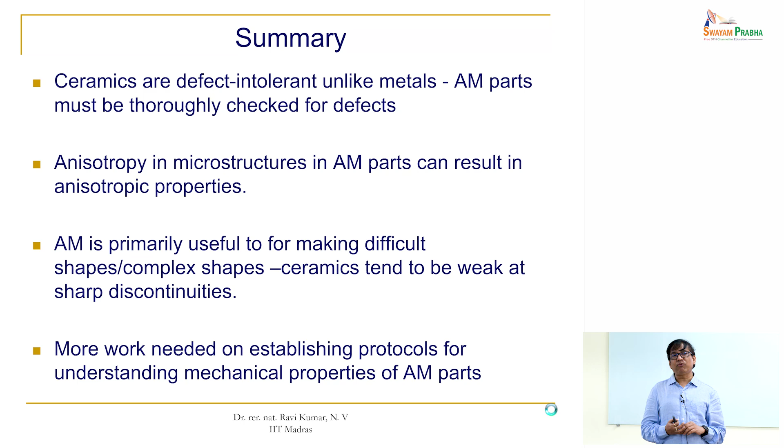So, single edge notch beam - these are standards. If you look at any ASTM standard, you will know what the crack length should be. There are standards which clearly say what the dimensions of the specimen should be, and for that dimension of the specimen, what crack length you have to produce.

All of this is experimental, and you should be very good with your hands, because when you create a notch, you need an atomistically sharp crack. You have to use a very thin blade so that you create an atomistically sharp crack of exactly that length. It's very important to do that carefully, otherwise you might create other artifacts, additional defects or additional cracks here and there.

Follow that and apply load in a 4-point bend setup, keep monitoring the load, and there will be some critical load at which the crack would start. That C will not be C anymore, it becomes C plus delta C. When it becomes C plus delta C, that C becomes your equilibrium crack length, and the sigma A that you applied becomes sigma F.

When you have a crack length, you keep applying load, and at some load the crack will give up and proceed further. You can check that immediately in the load curve - that becomes your critical load, sigma A, from which you can calculate sigma F. That C becomes your critical crack length, and for that critical crack length and sigma F, you can calculate K1C - the fracture toughness in single edge notch beam.